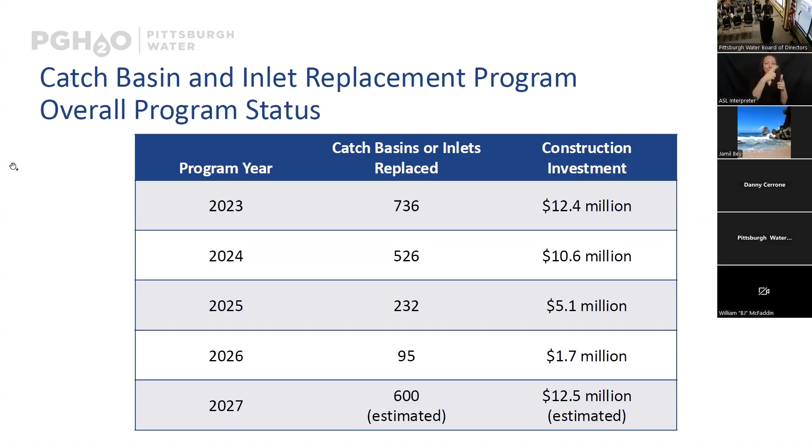In 2026, we enhanced our process for assessing the condition and location of these assets for purposes of prioritizing their replacement. We are now using a risk-based system, which was modified from national standards, which assesses both the physical condition of the basin to quantify the probability of failure, along with trying to quantify the consequence of failure by characterizing the location of the asset relative to the type of road it's located on and whether it serves a critical customer.

So in the table on the left, the criteria for condition assessment for probability of failure include but aren't limited to loose or missing bricks and whether the adjacent roadway has been impacted. When scoring a given asset, each of these conditions receives a score, and then that weighting is applied to calculate a weighted condition score. And then on the right, the criteria for consequence of failure include the type of roadway, such as tertiary, secondary, etc., and whether that basin serves a hospital, school, or other critical customer. So each asset is assigned one of those criteria on the right, which is then combined with the weighted condition score for a total numerical rating. And then we use that to prioritize the replacement of the assets.

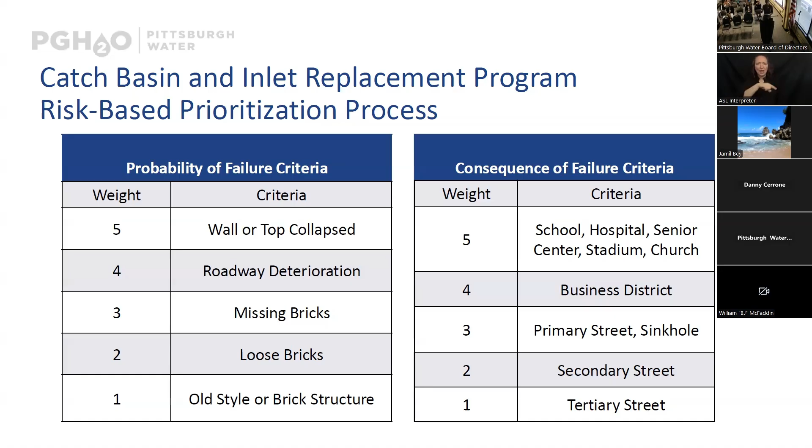So I'm going to show some photos here. These 2 are both showing some failing inlets or basins prior to us replacing them. On the left is a curb inlet at 30th and Paulowna in Polish Hill. You can see the top of that basin has collapsed and a sinkhole has formed in the roadway. This replacement was completed just a week or so ago. And in the photo on the right, there was a collapsed inlet grate on Rialto Place near Rialto Street in Troy Hill, which was replaced in early May with a catch basin to replace that inlet.

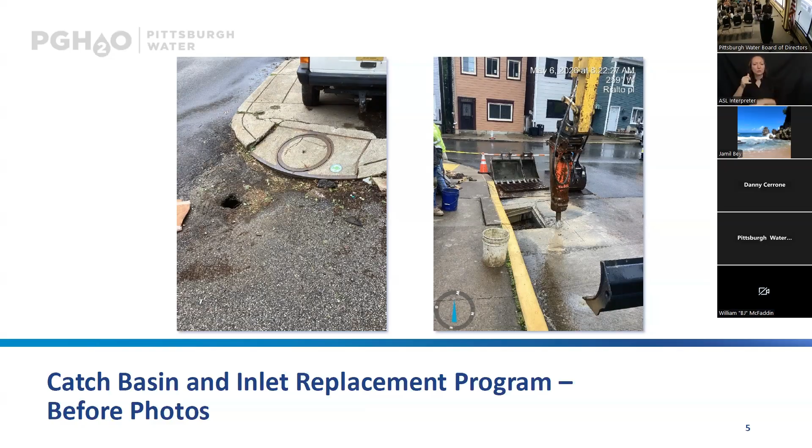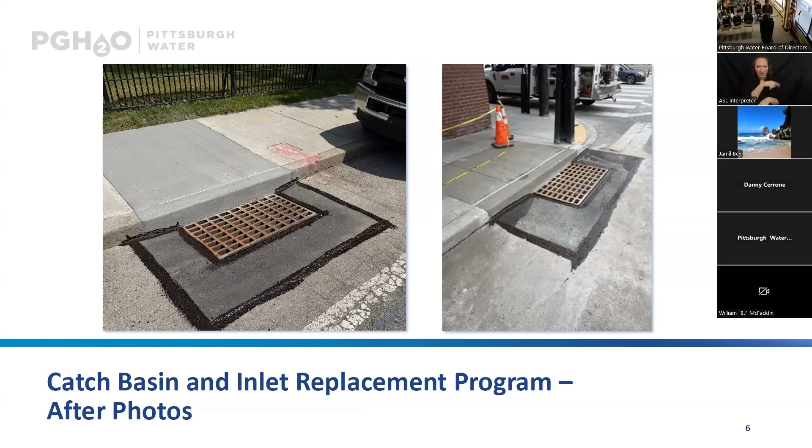So a couple representative photos of work following our replacements, which includes, of course, the restoration of sidewalks and roadways. These are located respectively on Brighton Road in Marshall Shadeland on the left and on Smallman Street in the Strip District on the right.

And then we have some before and after photos of the same location. So this is on Amberson and Ellsworth in Shadyside. On the left, you can see the roadway in front of this inlet had completely collapsed. And on the right, you can see that previous curb inlet has now been replaced with a modern style catch basin and grate, which helps prevent solids from entering our system better than the older open throat style.

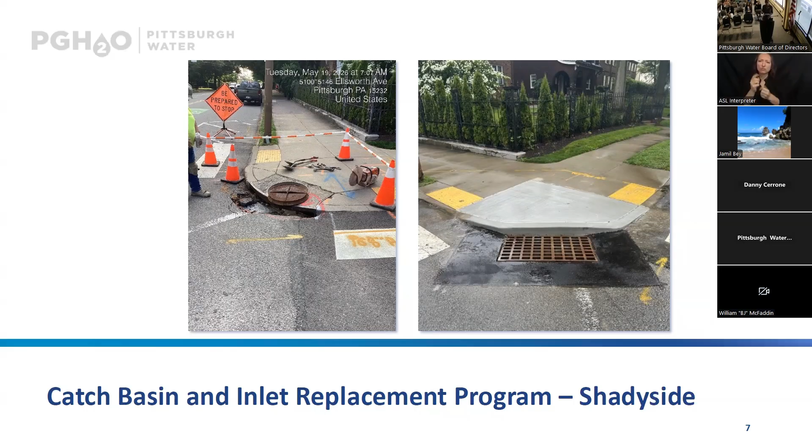And finally, on this topic, another before and after photo along Baldwin Road in the Hays neighborhood. In the before photo, you can see that basin and inlet had collapsed, and the surrounding surface was also collapsed and compromised, and the curb is also missing. So all of that has been remedied, as shown in the after photo on the right.

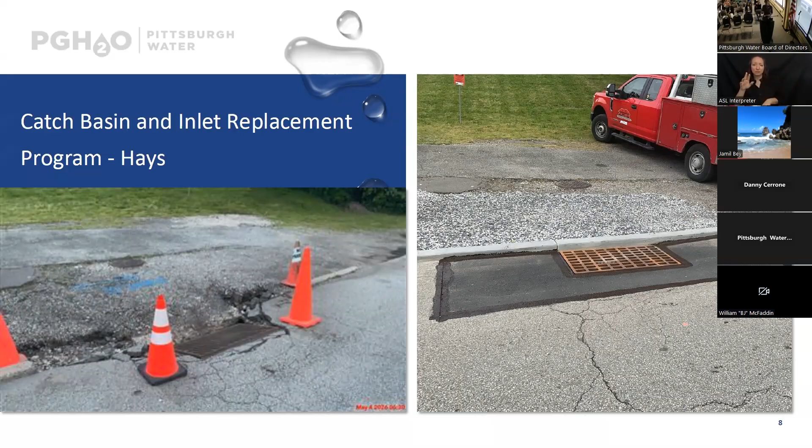So I'm going to move on now to our water reliability plan, and specifically I'm going to focus on our ABC project. So during July, we did make significant progress on that project, which is the Aspinwall Pump Station, Bruecken Pump Station, and Clearwell Bypass.

So at the Aspinwall Pump Station, construction of the masonry walls for the new chemical building continued, as shown in the photo on the left. And to orient you, the river is generally behind the photographer, and the Clearwell is behind the structure that you're seeing. At the existing Aspinwall Pump Station itself, lead abatement activities on the existing steel beams commenced, and structural steel reinforcement for the new electrical rooms was delivered.

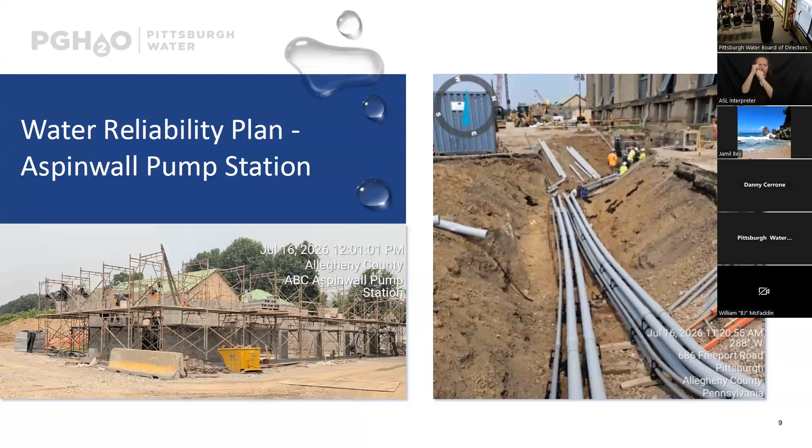Installation of primary electrical duct bank on the south side of the Aspinwall Pump Station was also completed, and that's shown in the photo on the right. So this is facing the Clearwell. You've got Aspinwall Pump Station on the right, and the river would be on the left. Upcoming activities at Aspinwall Pump Station include installation of structural steel on the precast roof system on that chemical feed building on the left, along with continued electrical work throughout the site.

For the Clearwell bypass portion of the project, Mascaro and their geotechnical subcontractor is continuing installation of the support of excavation, aka SOE system, progressing from west to east along the Clearwell through the pile drilling and lagging installation, as shown in the photo on the left. Micropile installation also continued along that west-east run. Construction of that SOE wall is expected to continue toward the inlet gatehouse through the end of July.

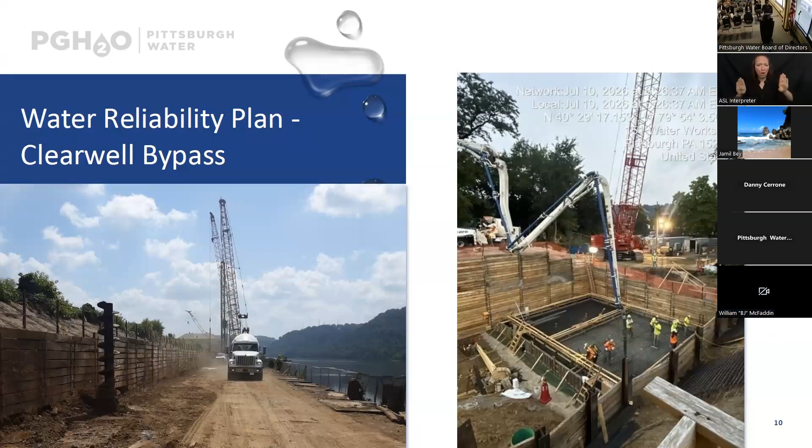And then shown on the photo on the right is the construction of the overflow vault. This is at the far west end of the Clearwell, where the base slab, consisting of more than 120 cubic yards of concrete, was successfully placed and remains under cure, with wall placements anticipated in early August. And as of this morning, the rebar for those walls has already been erected. Upcoming activities for the Clearwell bypass include continuing SOE installation, micropile construction, and commencement of the overflow vault wall pours.

And then lastly, for ABC, moving on to the replacement of the Bruecken Pump Station with what will be the future Washington Boulevard Pump Station. Mascaro and their geotech sub continued excavation operations, including installation of SOE wall piles, heavy excavation, and lagging outside the zone with asbestos-containing materials, as shown in both of these photos. Within the asbestos zone, Mascaro's environmental subcontractor continued bulk excavation and utility relocation activities as conditions allowed.

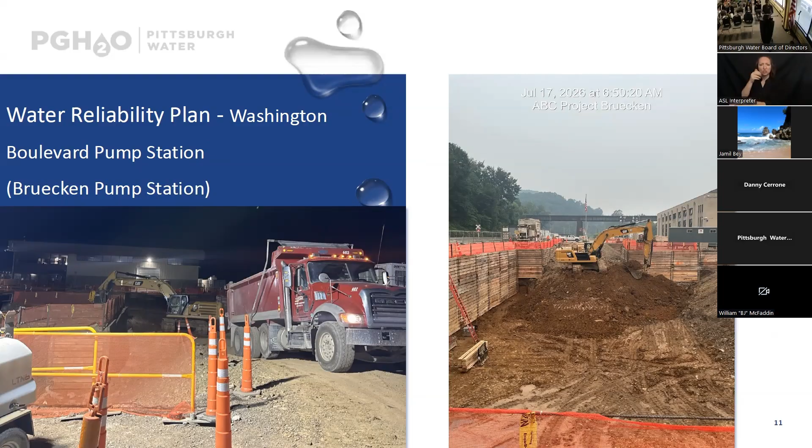Completion of final sanitary sewer and water line installations is anticipated by late this month, and excavation activities will continue through August, with electrical duct bank installations scheduled to begin after that.

Moving on to a brief update on our lead service line replacement program. This map shows the neighborhoods where we are actively replacing lead service lines, whether through our neighborhood lead service line contract shown in green, or our small diameter water line replacement contract shown in blue. It's probably a little hard to see in the back. A total of 15,683 public and 12,069 private side lead service lines have been replaced through yesterday.

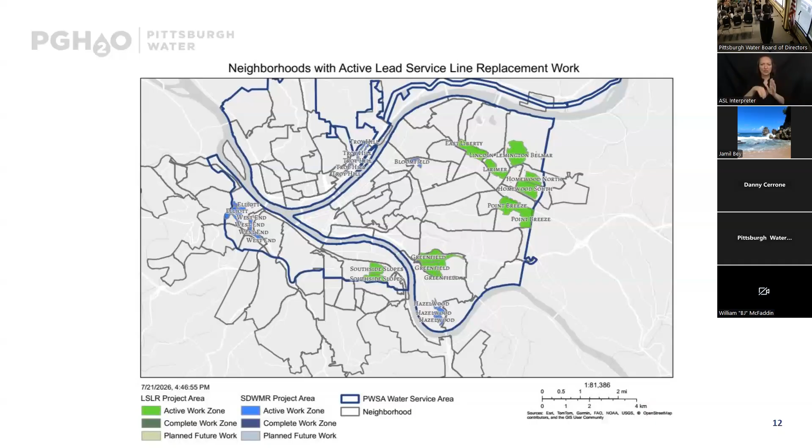And we currently have 11 active construction contracts involving lead service line replacements. And these are a combination of small diameter water main replacement, neighborhood, and urgent lead contracts. And that work does include the verification of the service line material, the lead service line replacement itself, water main replacements, and restoration of pavement and landscaping. We do not currently have any construction or engineering contracts out for bid at this time.

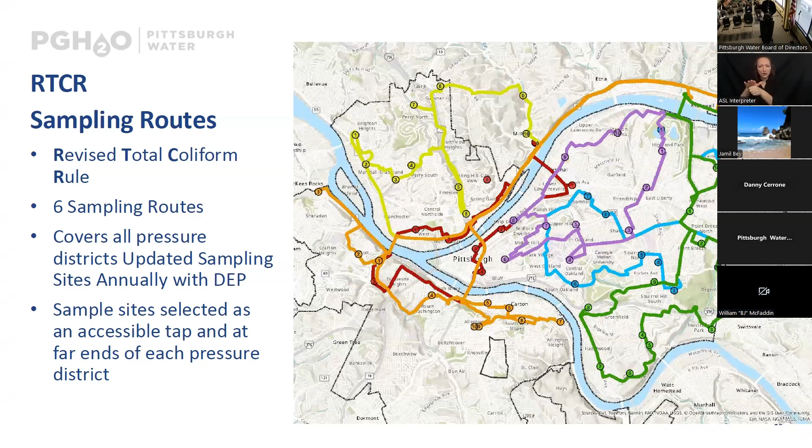The different colored lines show the 6 different routes that they may follow, and the dots represent areas where we collect samples. Those sample sites have been selected to represent some of the most distal points in each of our pressure districts, and are also locations that we can readily access, such as dedicated sampling taps, police or fire stations, or various public establishments.

Because of our system size, Pittsburgh Water is required to collect at least 210 samples from these locations every month. And our water quality team targets collection of 225 locations monthly, just to make sure we're above that actual required minimum. We target those locations, and in doing so, our chemists utilize a standard procedure to flush each one of those sample taps to make sure that we're collecting water that's actually representative of the distribution system.

And in doing so, we collect a sample to monitor for coliform bacteria, which we actually bring back to our lab at the water treatment plant and analyze those samples in-house. And in the field, we monitor chlorine residual, which is our disinfectant, pH, temperature, as well as orthophosphate, which is used for our corrosion control program.

In June, we produced an average of 62.5 million gallons of drinking water per day at our treatment plant. And we continue to meet and exceed those regulatory requirements that we need to follow, which include those 225 samples that we collect from the distribution system, as well as over 2,100 additional samples that our laboratory runs at the treatment plant and in other locations each month in June.

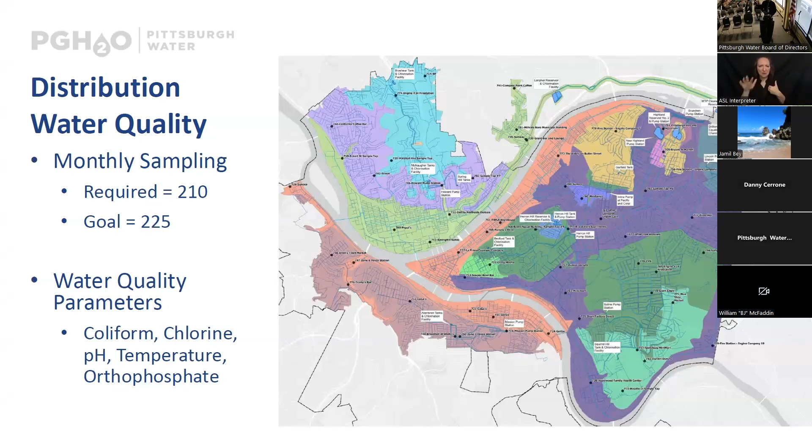The different colors, again, might be coming from our Highland 2 reservoir, or the Garfield tank, or Herron Hill reservoir, depending on which pressure district it's actually located in. One of the tasks of our valve and hydrant specialists, which are a union position within our field operations, is to actually perform routine hydrant inspections. And we strive to get to every location, every hydrant, at least once every 3 years. And in doing so, we want to confirm proper operation of the hydrant as well as the hydrant valve.

They flush the hydrant to help remove sediment. They measure flow and pressure at those hydrants, as well as maintaining the hydrant itself. They apply some grease to the nozzles and things like that so that they don't rust shut and can be opened easily and actually turned. Those valve and hydrant specialists and our crews also perform hydrant repairs if needed, or hydrant replacements. And we also complete fire flow tests that may be required for a developer or a contractor doing some work in the area so they can confirm available fire flows where they're doing their work.

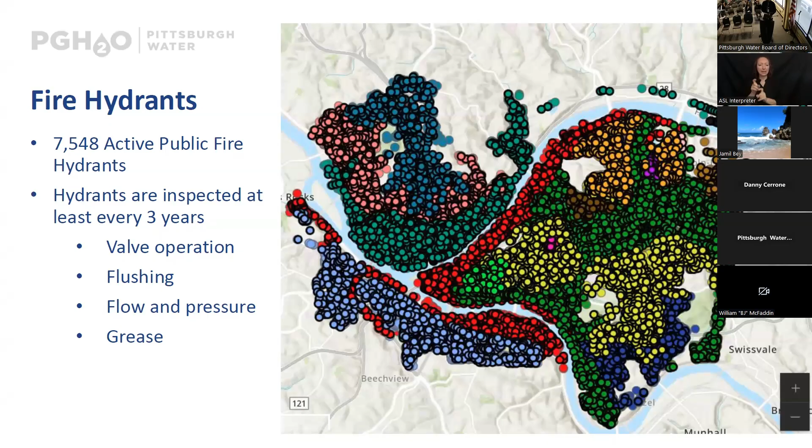To help maintain water quality, we also, though, use our hydrants for system flushing. Spot flushing, as kind of shown here, allows us to flow that hydrant and temporarily move water through the distribution system to help flush out accumulated sediment in the pipes, and also to help draw fresh water through those pipes to that hydrant. When spot flushing specifically for water quality, the hydrant will remain open at a low flow rate to continually flush the system. In the picture here, you can see that this hydrant's actually in a very nice location, but we'll run it very slow like that. It'll drop on the grass or along a curb line, and that again is allowing that water to be drawn through.

Once they do flush the hydrants, on the side there's a little field instrument that we use to help check the chlorine as well as the pH in the water. And so our chemists are out there monitoring water quality as we're doing that flushing. This week, we've actually had 7 hydrants open and flowing in different parts of our system for the purpose of water quality flushing. And those will be shut off once that water quality flushing program is completed.

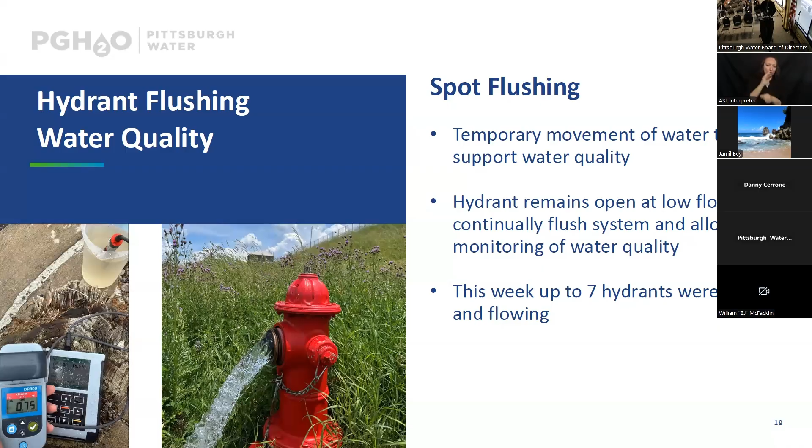But often if we're setting these automatic flushers up for extended periods of time, we'll attach a hose to them and extend the hose to a catch basin for discharge. These automatic flushers are set up with little timers in them so that they can be programmed to turn on and off. Instead of running nonstop, they may turn on and run for a couple hours a day and shut off. And we're also able to turn them on and off at certain times.

So often we try to do this automatic flushing during daylight hours so that they're not turning on and off in the evenings or nights or something like that, especially if they're in a residential area themselves.

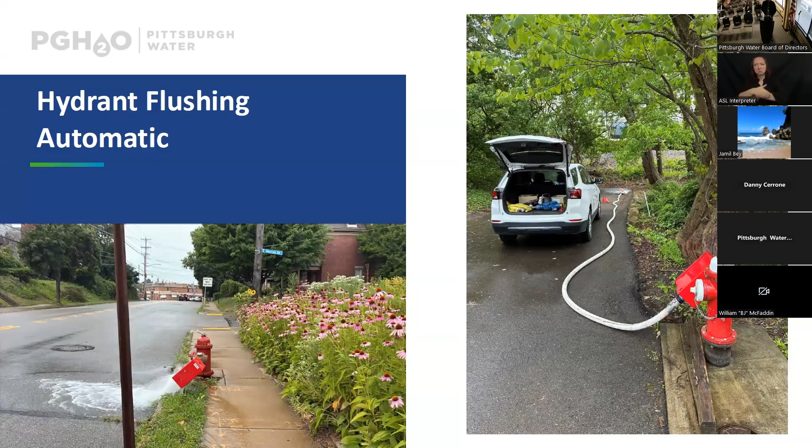I did want to provide a quick update on the side of our environmental compliance department. In the last month, the month of June, we completed over 320 compliance inspections of our storage tanks, our various waste handling and storage areas, our air obligations, as well as some of our wastewater and stormwater facilities.

June also was the end of the second quarter. So second quarter as well as semi-annual. It's hard to believe we're halfway through the year already. But that does trigger for our compliance group multiple quarterly as well as semi-annual reports that we need to file.

So one of these is our storage tank status report on a consent order that we have, as well as our NPDES discharge monitoring report. That's for stormwater discharge associated with our water treatment plant.

Our ALCOSAN self-monitoring compliance report, which we have for discharges to ALCOSAN from our water treatment plant, and then air quality reports that we have for our water treatment plant, generators that we have at our Bruecken pump station, as well as now a new one, our generator that we have up at the Highland Reservoir pump station.

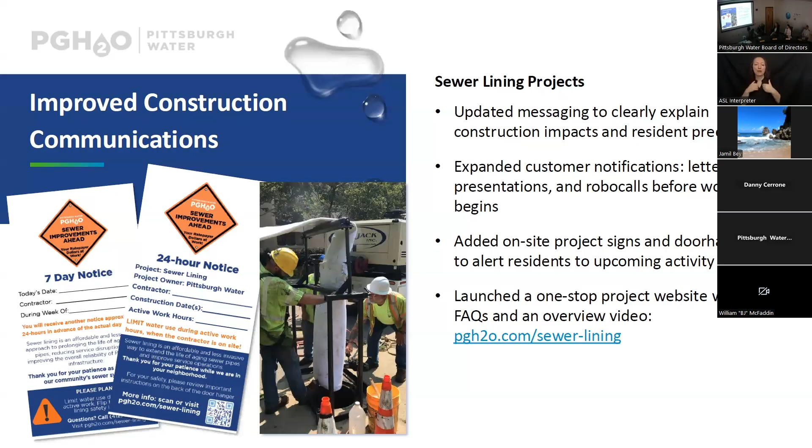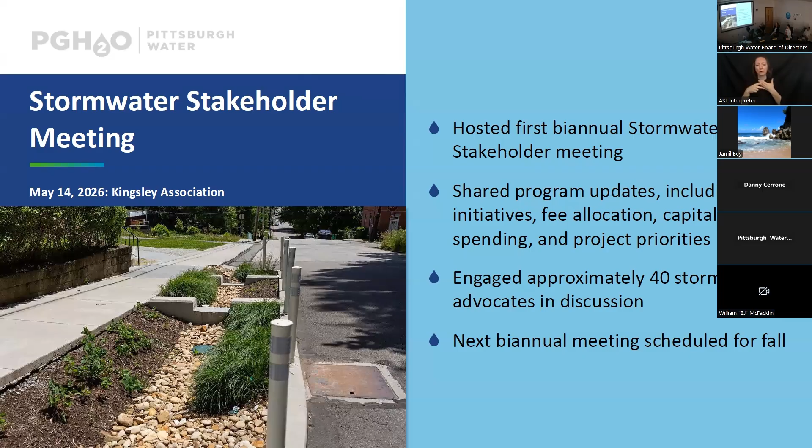We held our first stormwater stakeholder meeting. We've spoken about stormwater over the years, but this was an engagement that was actually committed to as part of our Public Utility Commission rate case settlement. We held that in May, and I know we had at least one board member attend. We appreciate that support. This was an opportunity for us to discuss ongoing projects and the future direction of our stormwater programs and projects. There were approximately 40 interested advocates included in that discussion, and we will have a second meeting this year in the fall.

Also wanted to draw attention to a new program that we have partnered with both the City of Pittsburgh, the Department of City Planning, and the nonprofit water group Water Now Alliance. It's called Rain Reclaim, and the general concept is to take advantage of vacant parcels and repurpose them for stormwater management. So there are 2 potential sites that are coming out of this effort. I will say this effort is supported by a grant from Water Now Alliance, and the team is now evaluating locations and determining next steps for potential inclusion in future capital improvement plans. So an exciting potential case of us utilizing available space, turning it into a public benefit, and aligning with our mission to manage stormwater.